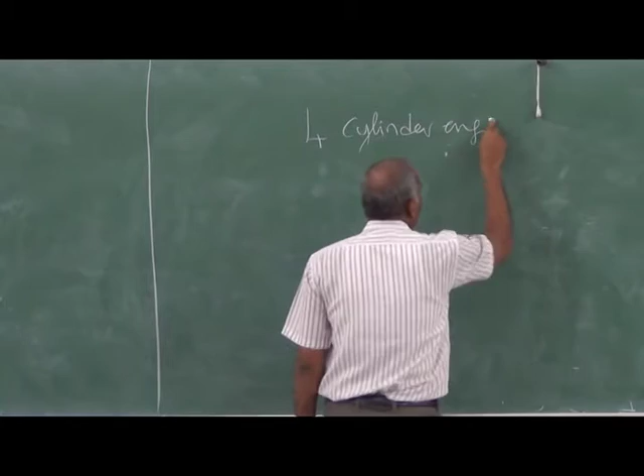We have seen the balancing of a 4-cylinder engine and a 6-cylinder engine. In a 4-cylinder engine, the final outcome of the discussion is that the secondary forces are not balanced.

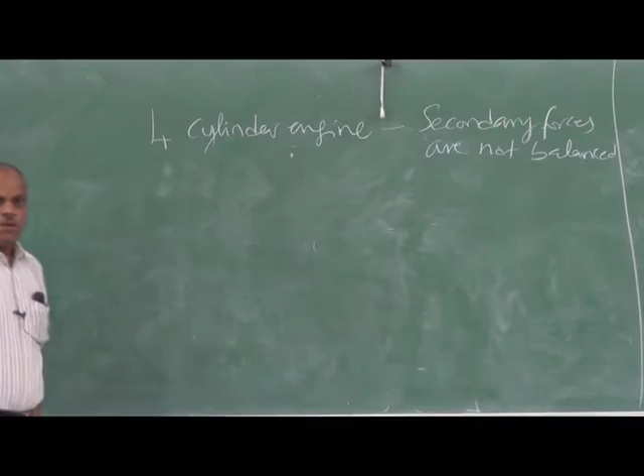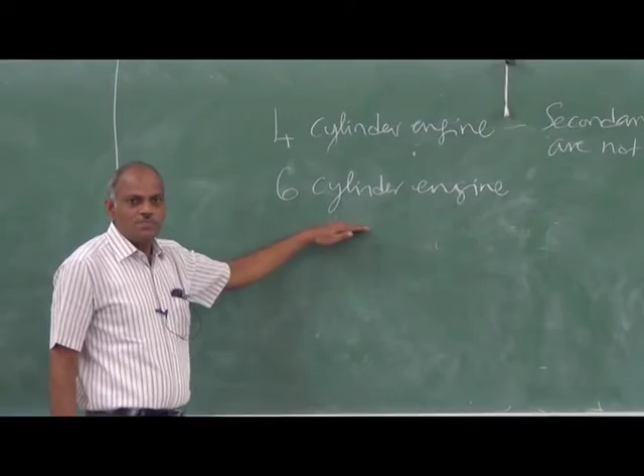Then we discussed the balancing of a 6-cylinder engine. Of course, what I refer as a 4-cylinder engine should have that particular crank configuration. In a 6-cylinder engine with 120-degree crank angle configuration, we found that all the primary forces, secondary forces, primary couple and secondary couple are all balanced.

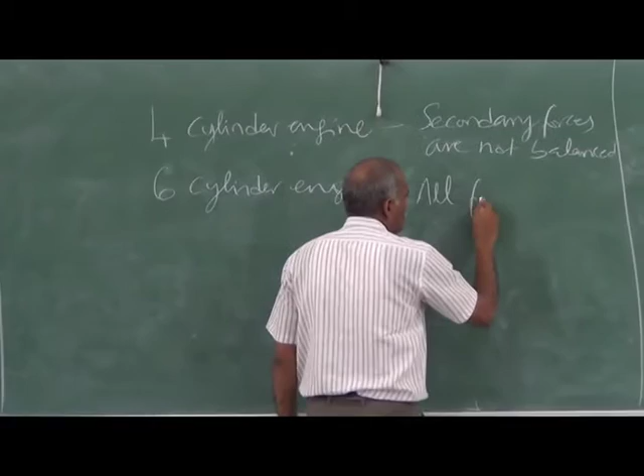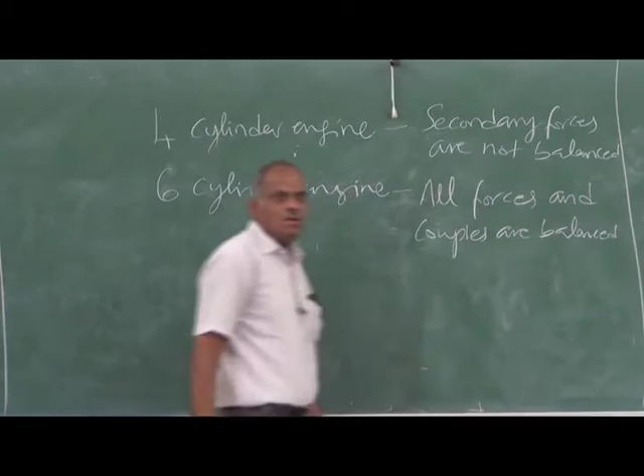So all forces and couples are balanced. That's why the 6-cylinder engine is a popular configuration. Wherever possible, your truck engines, your bus engines, you will find are 6-cylinder engines, because balancing-wise this is a very preferred configuration.

But we should also discuss other configurations before leaving the multi-cylinder engine topic. That is the 3-cylinder engine. Why 3-cylinder? If we ignore 3-cylinder, we are doing injustice.

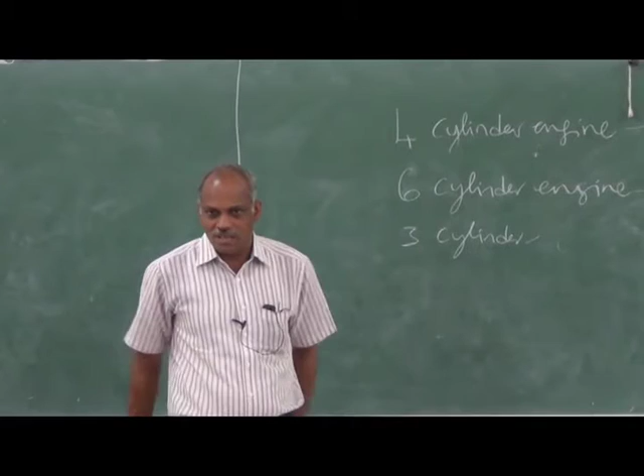So cars used to be expensive. But later, in the 1980s, Maruti introduced a version called Maruti 800. It was a compact car costing about 50,000 rupees. Many people could afford to buy a car. But Maruti 800 had only 3 cylinders. Many cars of today, you find only 3 cylinders, not 6 cylinders.

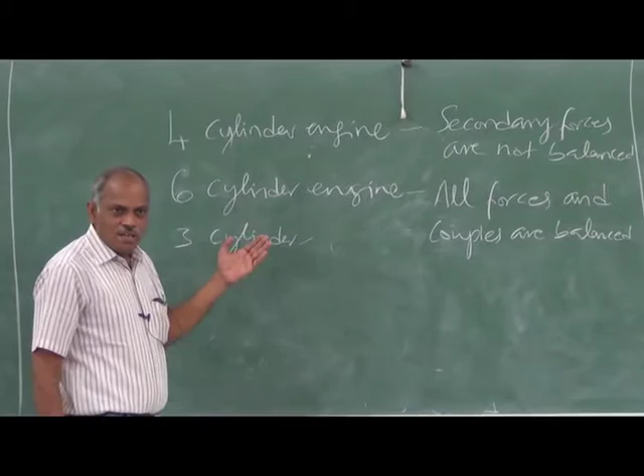So in a 3-cylinder configuration, what are the issues? Whether a 3-cylinder is also balanced in primary and secondary forces and couples - that is what we have to briefly discuss.

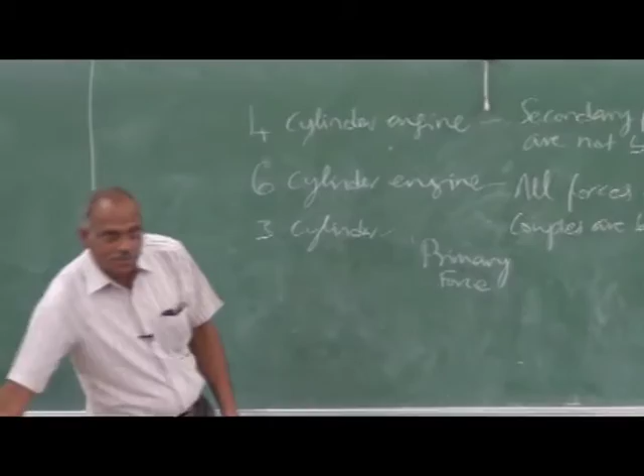So look at the 6-cylinder configuration, the primary force polygon. If you recall, the primary force polygon of a 6-cylinder engine looks like this. This is for the first cylinder, this is for the second cylinder, this is the third cylinder, then the fourth cylinder, then the fifth cylinder and the sixth cylinder. This is the primary force polygon of a 6-cylinder engine, you can recall.

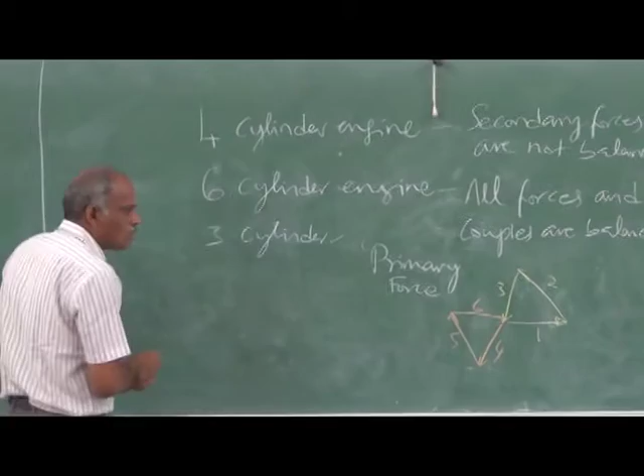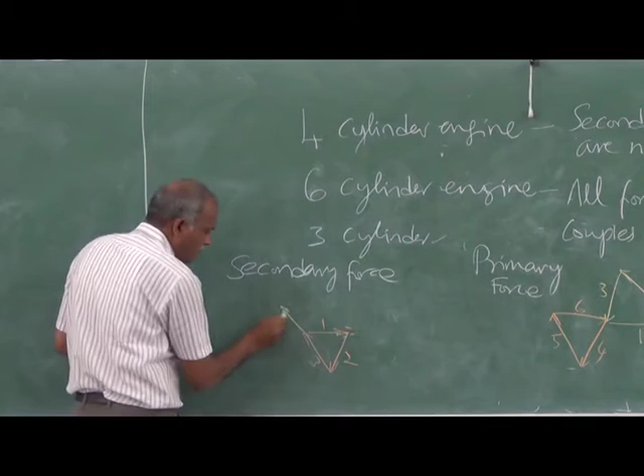The secondary force polygon of the 6-cylinder engine again is, for the first cylinder like this, but this will be approximately 1/4 of the magnitude of that one. This will be the second cylinder, this is the third one, then the fourth, fifth and sixth.

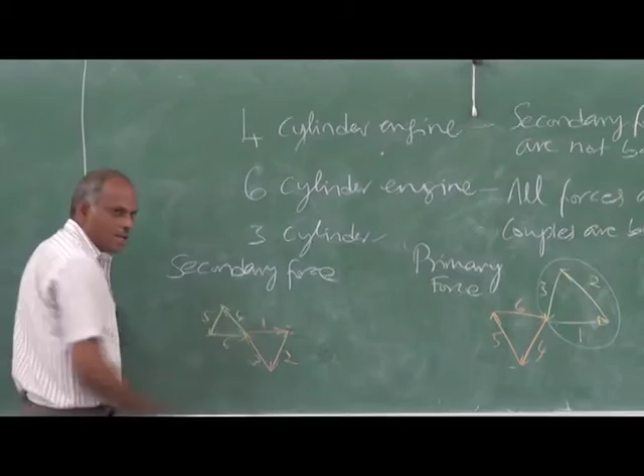So if you look at this, what we can say is, if you take the 3 cylinders alone - the first, second and third cylinders - you will see that particular part of the polygon is closed as far as the primary forces are concerned. Whereas for the secondary forces, you can see the first 3 itself is closed. So without elaborating, if you look at the 6-cylinder engine analysis, the primary forces and secondary forces are balanced separately.

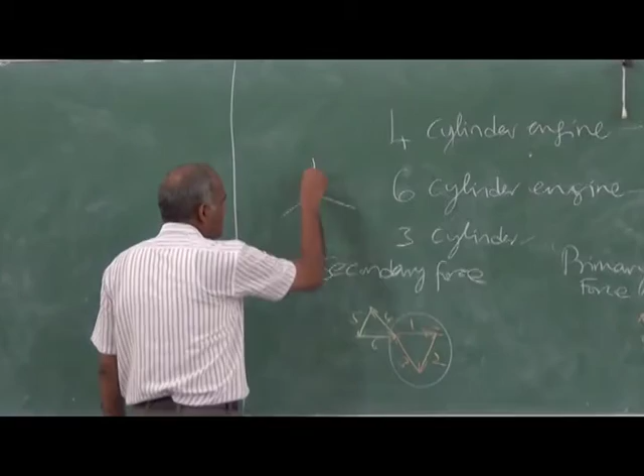So if I have a 3-cylinder engine like this with 1, 2 and 3, the primary force and secondary force will be balanced. But whether the couples will be balanced is the question, because for a multi-cylinder engine, not only the forces but the couple also should be balanced.

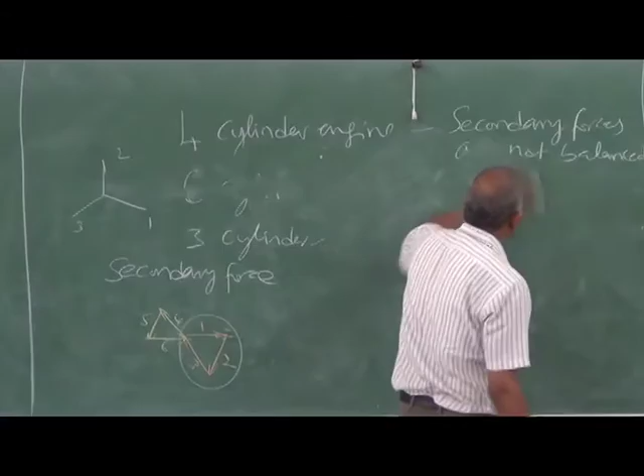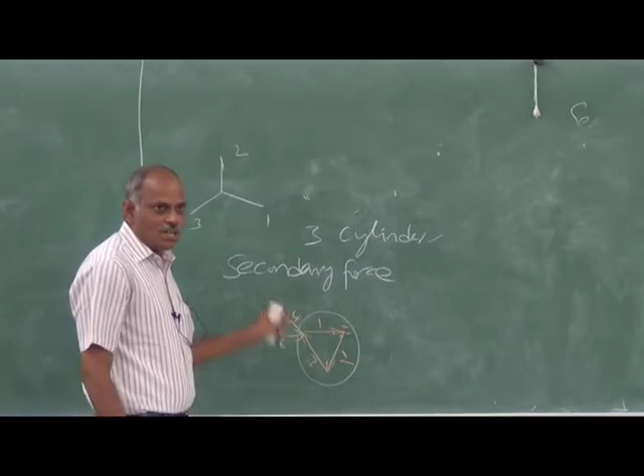So for the 3-cylinder engine, which is the most popular in cars today, the one to start with in India is Maruti 800. Today many cars, if you see, only have a 3-cylinder configuration. In the 3-cylinder configuration, primary forces and secondary forces are balanced, but what about the couple?

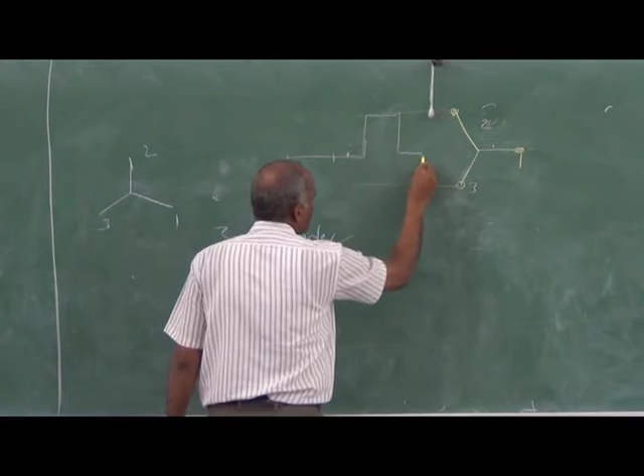So let me draw the configuration. If I take this as the first cylinder, then this is the first one, second, this is third. So if I project this, this will be my second one, this is my third. So this is the first cylinder crank, this is the second cylinder crank, this is the third cylinder crank. This is the side view of this.

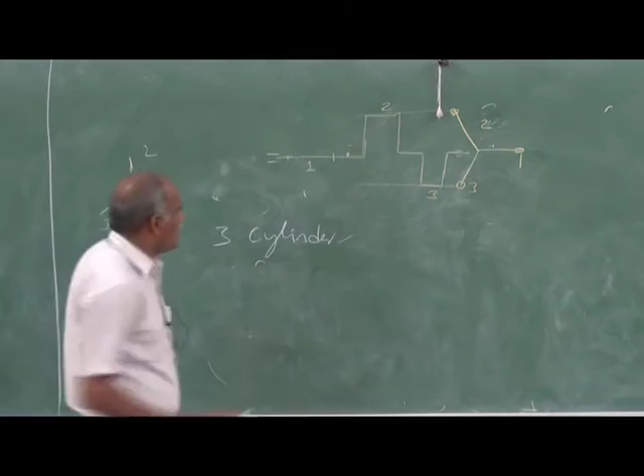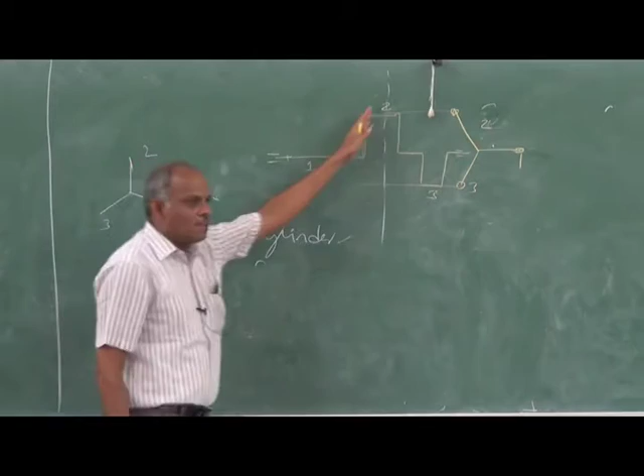So if I take the center of gravity plane of this 3-cylinder block, the center of gravity will approximately pass through the second cylinder, because with 3 cylinders, the middle cylinder will be the center, so the CG plane will be like this. So the moments created by cylinder number 2 will be zero, because it is the plane which contains the CG.

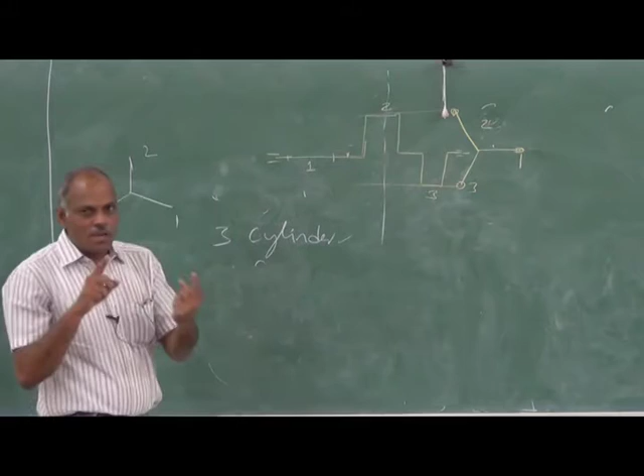But if you take the primary moment created by cylinders 1 and 3, it cannot be balanced because they are not at the same angle. So they will not be producing the same magnitude - they are at the same distance, that doesn't matter, but since the crank angles are different, they may not produce the same force at every instant. So in this particular configuration, the primary couple and the secondary couple will not be balanced.

So in a 3-cylinder engine, you will find that the couples are not balanced. But I don't know that in Maruti I could not find any balancing arrangement. We opened the thing, we could not find it.

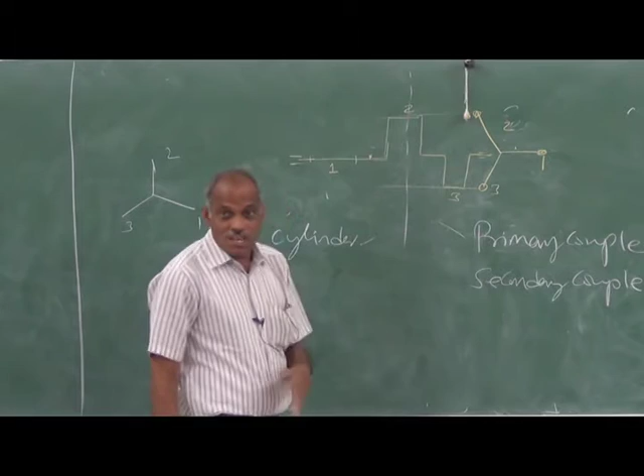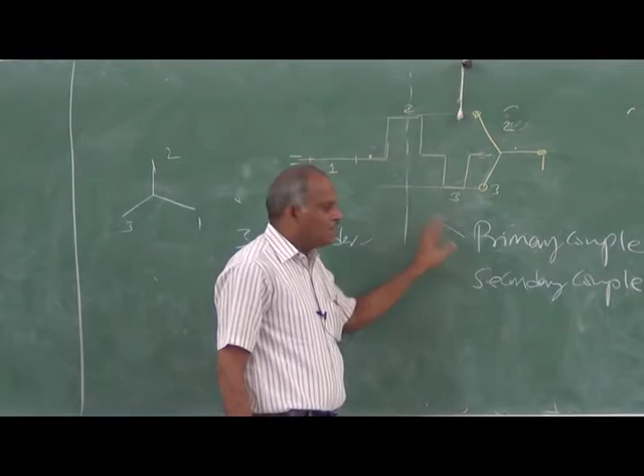But you have to see the new version, new generation of engine. I didn't find any information, but the new generation engine has only 3 cylinders, so whether they have a balancer for a couple, that we have to find out. Then only this will be complete.

So I will discuss now how the 4-cylinder engine secondary forces are balanced and how couples can be balanced. Okay, so that is our discussion. You have any doubts?

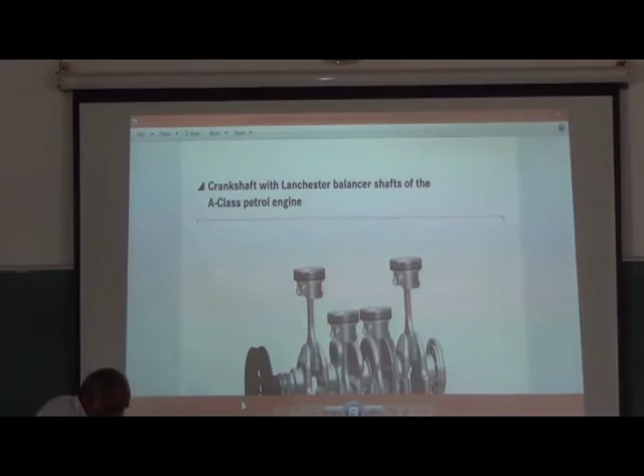Projected is a 4-cylinder engine. It is a crankshaft with a Lanchester balancer shaft for an A-class petrol engine. So it is a 4-cylinder engine. Obviously we have discussed that a 4-cylinder engine doesn't have the automatic balancing of the secondary forces. Therefore, how to tackle the secondary forces? We have to use a Lanchester balancer. So that is what you can see here.

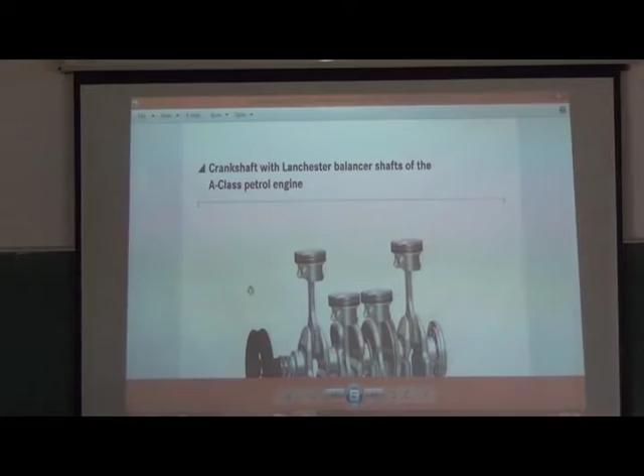So where is the Lanchester balancer? This is the balancer, located exactly at the middle plane, so that you understand all the forces are acting in a plane. As far as reciprocating unbalance is concerned, they act in a plane. So you have to think of always 4 parallel forces. As the parallel forces are concerned, it will act in the middle plane. So the balancing is done in the middle of the plane, and the Lanchester balancer is provided there.

So what is the configuration of it? As we have seen in the Lanchester balancer, there will be 2 rotating wheels. So we will see the basics. This is about used in a Mercedes-Benz engine.

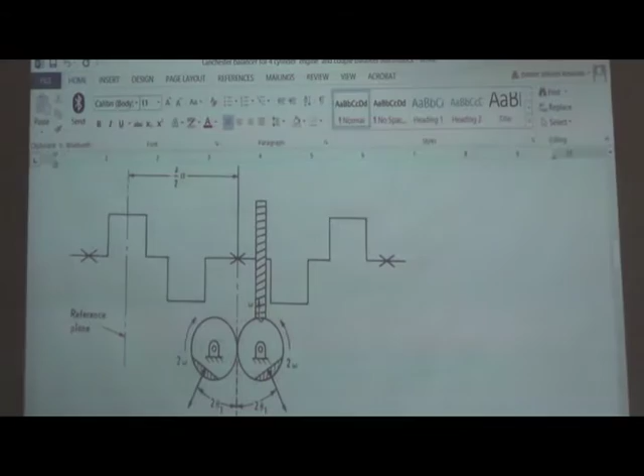This is how the Lanchester balancer is used. We have discussed how the Lanchester balancer produces a force of varying magnitude, sinusoidally varying magnitude. So what we need is 2 rotating unbalances. They have to rotate in the opposite direction. So these unbalances will produce inertial force.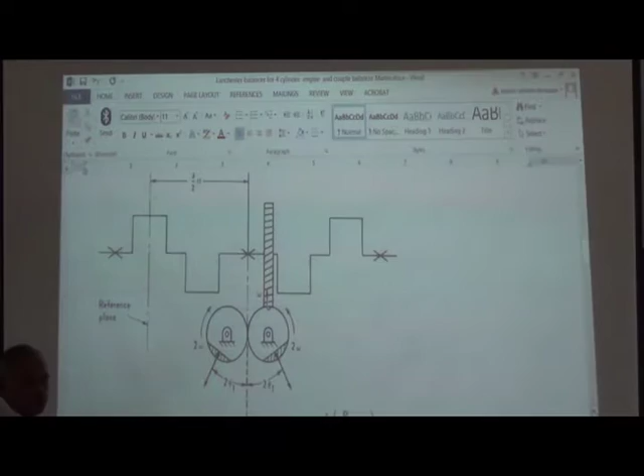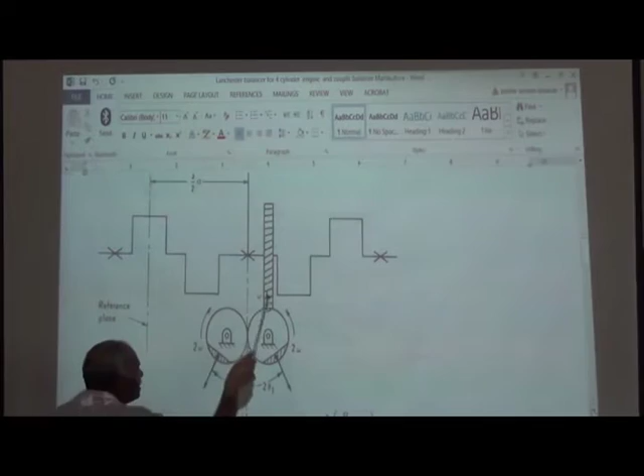It is driven by a gear which is connected to the crankshaft, so that the angle relationships are positively maintained. I cannot use a belt drive, meaning a small angular difference that cannot be accepted. So it has to be a positive drive. The positive drive is taken by gears, so you have a crossed helical gear. You can recall a crossed helical gear, where you can have a shaft at right angles. So crossed helical gears are used here, and these are 2 gears in engagement.

This is exactly placed at the center of the plane. This is the arrangement as far as the Lanchester balancer is concerned, which cancels the secondary forces, because in a 4-cylinder configuration secondary forces are there which could not be cancelled otherwise. So the Lanchester balancer helps you to cancel this. So that is about the 4-cylinder engine — with the help of a Lanchester balancer, I can have a perfectly balanced engine. That's what a refined engine like the Mercedes-Benz engine does.

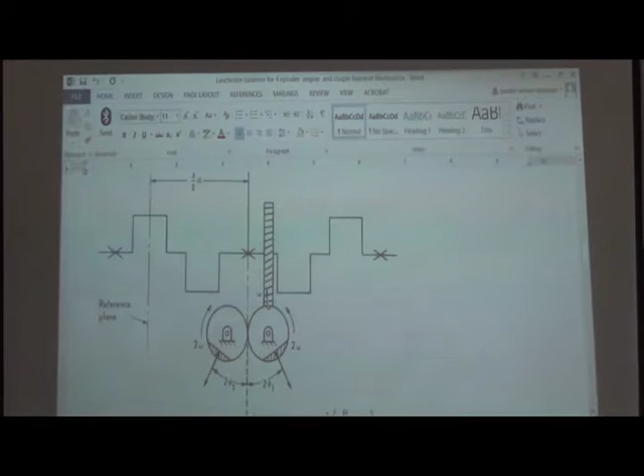Now, when it comes to the three-cylinder engine, you find that the couples are not balanced. But is there any way to balance a couple?

We have said the Lanchester balancer is a device used to create a force of varying magnitude acting in a single line. Whereas, is there any device which can produce a couple of varying magnitude? That can be used for balancing a multi-cylinder engine which produces a couple, and balance it. So here is a device like this.

You can see the device uses, like a Lanchester balancer, an unbalance. So when they rotate, they will produce a force, but it is designed such that these two forces are exactly opposite in direction, parallel in action, therefore it produces a couple. So it looks similar to a Lanchester balancer, but the function is different — this produces a couple.

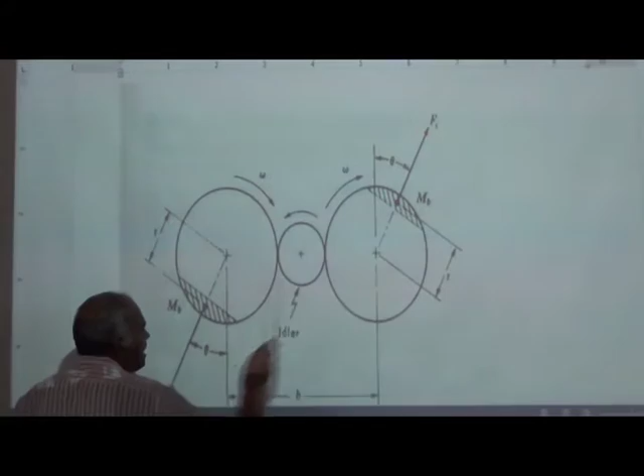In the Lanchester balancer, you can see that these two masses will be at the same angle from the vertical or horizontal, whichever reference, but here the angles are in the opposite direction. They are 180 degrees opposite in angle, so that they produce the forces in the opposite direction.

Another variation you can find with the Lanchester balancer is that in the Lanchester balancer, these two wheels are directly engaged so that they rotate in the opposite direction. But here, these two rotate in the same direction.

If two gears need to rotate in the same direction, you have to use an idler. So here you are using an idler, which produces the force.

Now it produces the couple. So when this is in the vertical orientation, the force from here will be like this, the force from here will be in the opposite direction. What will be the couple magnitude? It will be this force into the distance, that is b here.

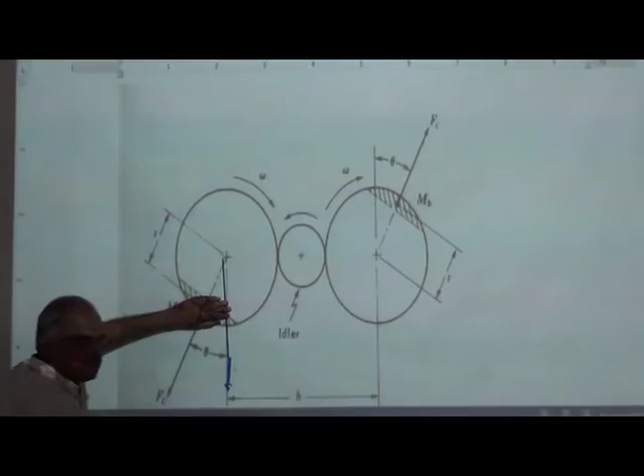That is how it produces a couple. Both of them are going to turn in the same direction. Say this turns clockwise by theta, this also turns by angle theta. So still they are parallel and opposite, and they produce a couple.

But what about their magnitude? You can quickly work out that the distance between the two forces would decrease, and that will become zero. The distance will become zero when these two rotate and come here like this.

When they occupy this orientation, this is in this direction, this is opposite, but the distance is zero. So this produces a kind of sinusoidally varying magnitude couple.

That particular sinusoidally varying magnitude couple can be placed anywhere on the engine to balance the couples produced. If this rotates at the same speed as the crankshaft, this will cancel out the primary moment. If it rotates twice, and you select the magnitude such that it balances the secondary, it can balance the secondary.

So this is a device that is used intelligently to cancel out the couples. It produces a couple.

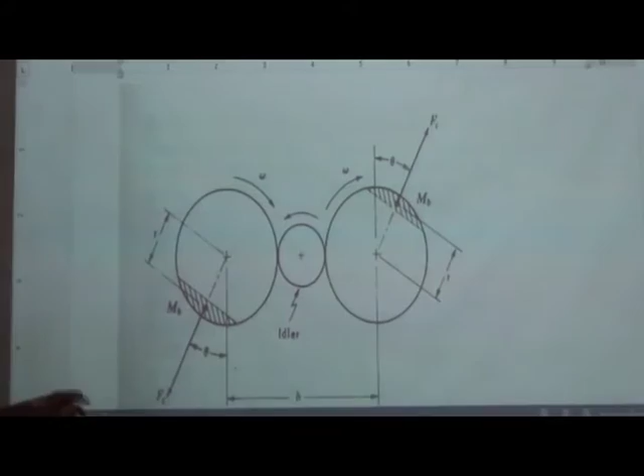I will quickly work out how it works, how the angle is a component of this, how the couple magnitude is a component of cos theta. Let me quickly draw a diagram and show you. Do you have any doubts?

Okay, we'll pause and then go back to the board.

This is the configuration of a couple balancer. Of course, there is an idler wheel here, so both of them will rotate in the same direction. Let us take that it rotates in the clockwise direction.

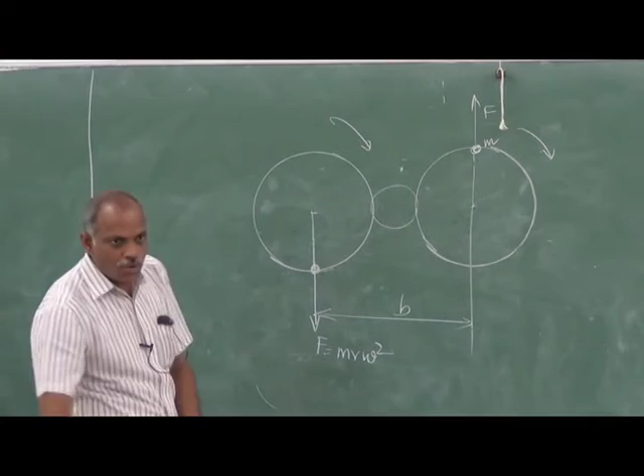Now when the masses are in the vertical direction, the forces produced by them will be equal, that is mr omega square. One will be in the downward direction, the other in the upward direction. These are two parallel forces with an offset distance b. The couple produced in this configuration at this moment is F, so the couple M is equal to mr omega square times b. There is no issue.

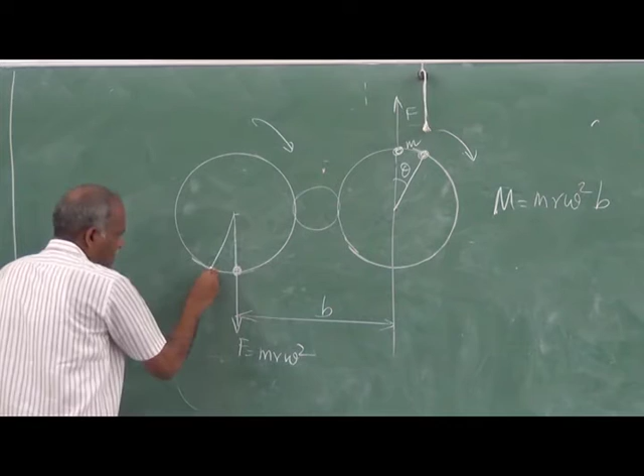Now when this turns and occupies this position later, that angle, if you take, is theta; this also will turn by the same angle, because they are rotating at the same velocities. So if I draw this line...

That is the direction in which my force will act now. This is the direction at which the force will act. This is the direction at which the force will act now.

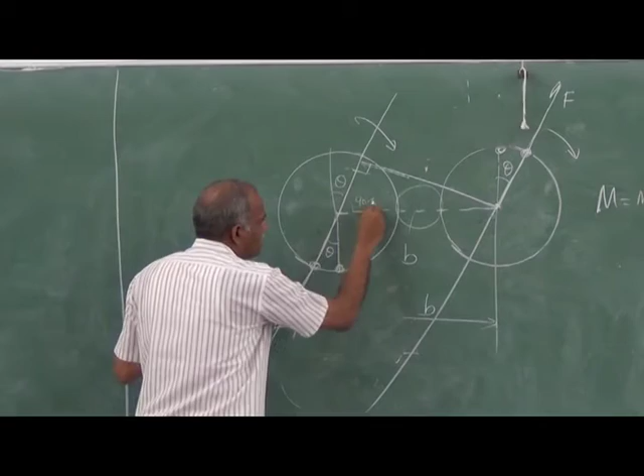So the distance between the two is decided by the shortest distance, so I draw a perpendicular to this. If you take this distance, that is your center distance between the two wheels, that is B. And of course this is theta, and if you take this angle also it will be theta. This will be 90 minus theta. So this angle should be theta.

So what will be this value? Suppose I take this distance as x right now, so I have to replace this b with x. That is equal to mr omega square times b cos theta. So you have b cos theta.

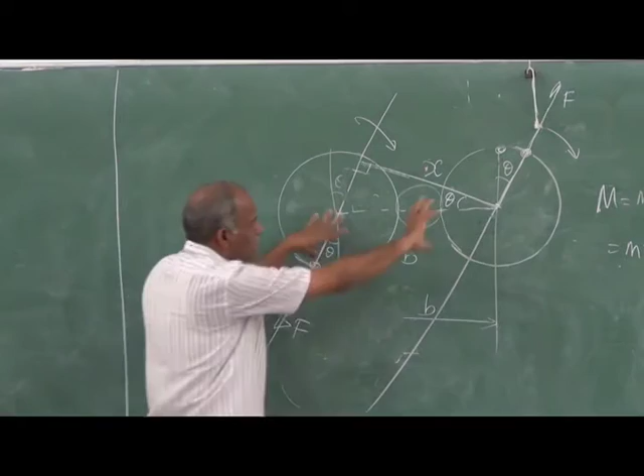So when these two wheels rotate in the same direction, the masses occupy this position, and the magnitude of the moment changes as a cosine function. That is what we are looking at, as far as reciprocating masses are concerned, because mr omega square cos theta will be the force produced, and the distance of the particular cylinder from the reference plane, the center plane, will be b, so it will be cancelling out. This is how this particular thing works.

Do you have any doubt?

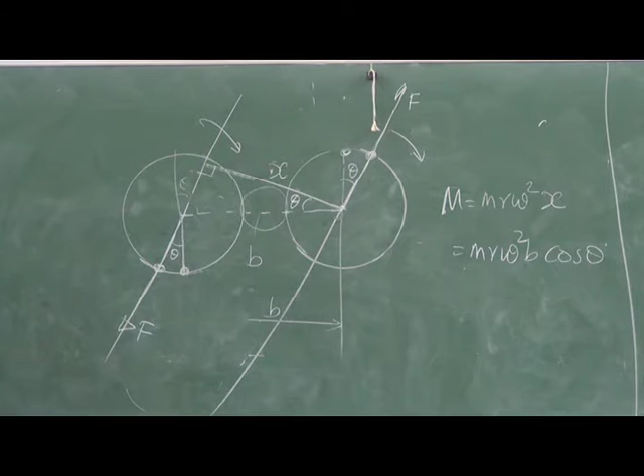A 3-cylinder engine without this kind of balancer will be producing a couple unbalance. If it is negligible, you can live with it from a cost-benefit point of view. Otherwise, if you want a refined one, you must use such balancing devices to balance it.

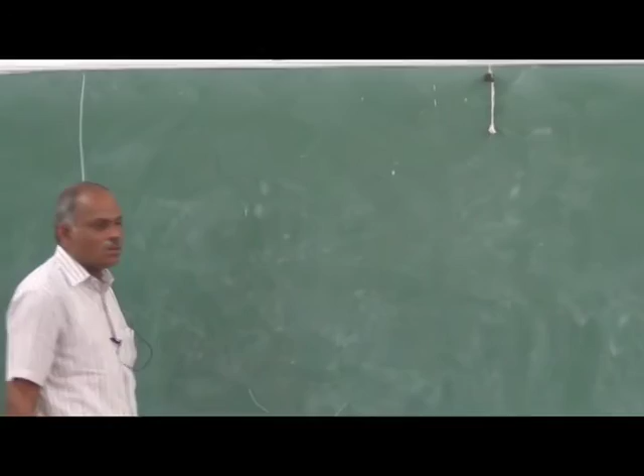Now coming back, with this I think I have finished balancing of reciprocating masses as well. The next topic, as I told you, is balancing of complex motion devices, the devices which are moving in a complex way.

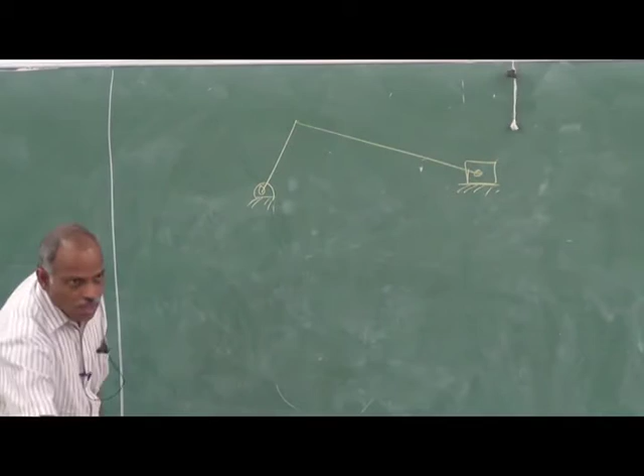So you see that when you think of a crank, this is rotating, the piston is reciprocating. Of course, a crank will have an unbalance. Obviously this will be having a configuration, this will be unbalanced here, so this needs to be balanced.

So the principles that are used for balancing a rotating thing can be applied here. So I can provide something in the opposite direction, because the balancing mass can offset the unbalance of this, our rotating mass is like this.

So this is the mass I have added to overcome the rotating mass unbalance. Then, as far as the reciprocating masses are concerned, I can balance it at least partially. I add a little more additional mass required to balance the reciprocating part. So I can say this is rotating, this is reciprocating. This is how I partially balance it.

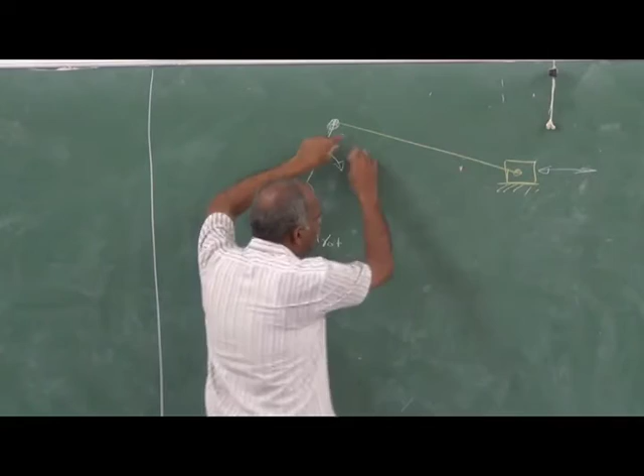But what about the connecting rod? The connecting rod will also be having a mass, will also be having a moment of inertia. So how to balance the forces acting on it, because it is going to produce some inertial force. We have seen in the inertial force analysis that this is to be balanced. So how to balance it?

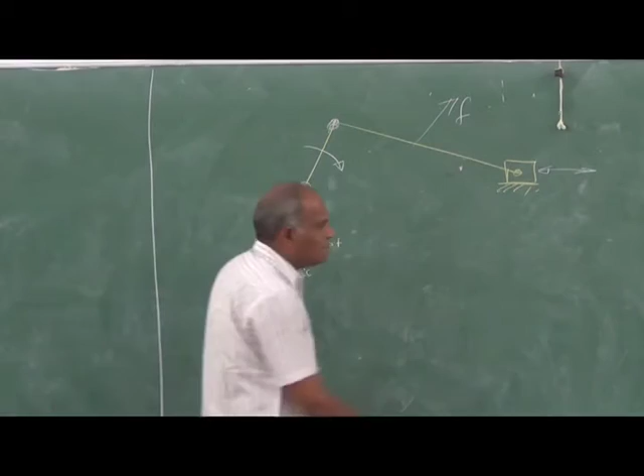We know how to balance the rotating unbalance and the masses, we know how to balance the reciprocating masses, but we do not know how to balance the complexly moving masses. So how to do that is to go back to the idea of the dynamically equivalent system.

You know the dynamically equivalent system, we can model any mass like this with two concentrated masses. The condition we know is that the Cg of this should be same. So you can recall that idea and bring it here for finding out the dynamically equivalent of your connecting rod.

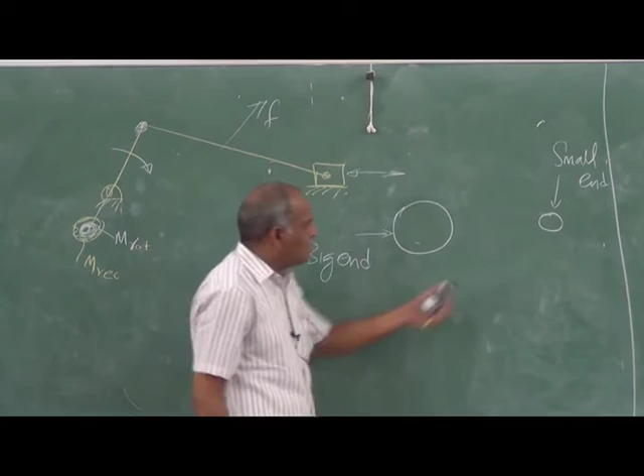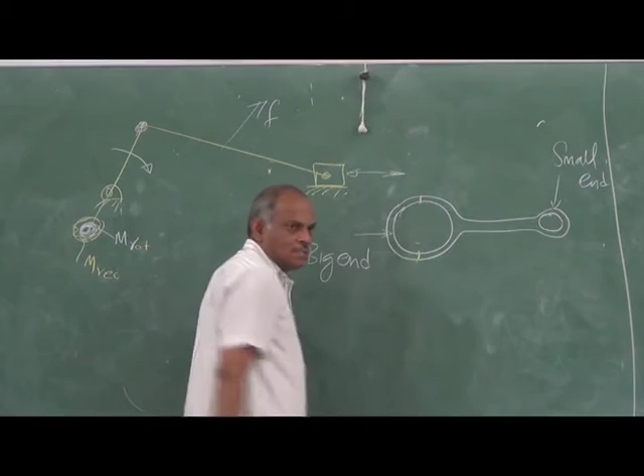The connecting rod will have some configuration like this. This end is called the big end, this end is called the small end. So this is connected to the crank and this is connected to your piston, that is the gudgeon pin. So this will have some configuration like this. And of course, for assembling the connecting rod of a multi-cylinder engine, this will be split here because you put it and then attach. So those details you can see.

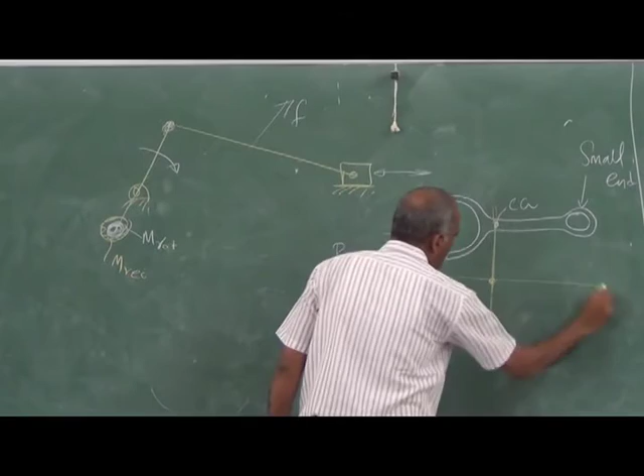Now this center of gravity will be approximately here, that you can find. This will be your Cg. So you try to model this as a two mass system so that the Cg is still the same. So you can find out the two mass system. I can have one mass here at a distance, say L1. I can find out what is L2 here. So this is my mass M1, this is mass M2. This will be my so-called dynamically equivalent system of a connecting rod.

So you remember there are three conditions for a dynamically equivalent system: the mass should be same, then their center of gravity should be same, and their radius of gyration about Cg should be same. So three equations, but four unknowns are there. So you have to start by assuming something.

Let me assume that it has to be placed at the center of this big end. So that location I am fixing. With the three equations I can find out what is M1, L2 and M2. But you will find that this mass is not located at the other end, that is the small end bearing, at the center of the small end bearing.

When you calculate the dynamically equivalent system of a connecting rod, you choose to place one of the masses here at the center, then you will find that L2 is such that... how do you find out? L1 is fixed, K square is equal to L1 into L2. So L2 is automatically fixed. So that will be here somewhere, which is invariably short of this, the small end of the connecting rod.

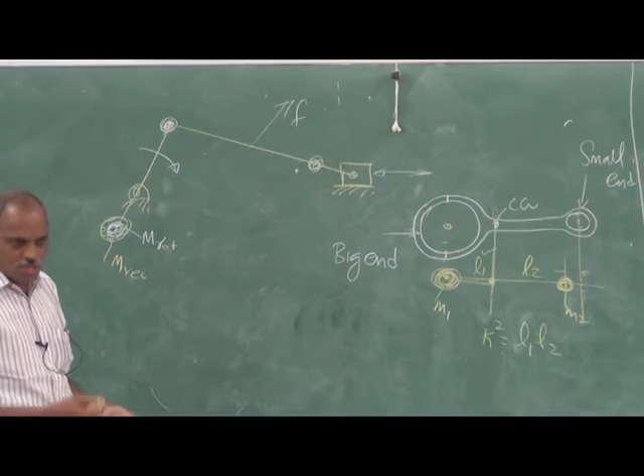I said that if you find a dynamically equivalent system with two masses, I can place one mass on a rotating crank, the other mass at the reciprocating thing. But when I work it out, I find that if I choose one of the masses to be at the center of the big end, the other mass location is not fixed there—it will be somewhere short of it. So what we do is we forcibly shift this mass here.

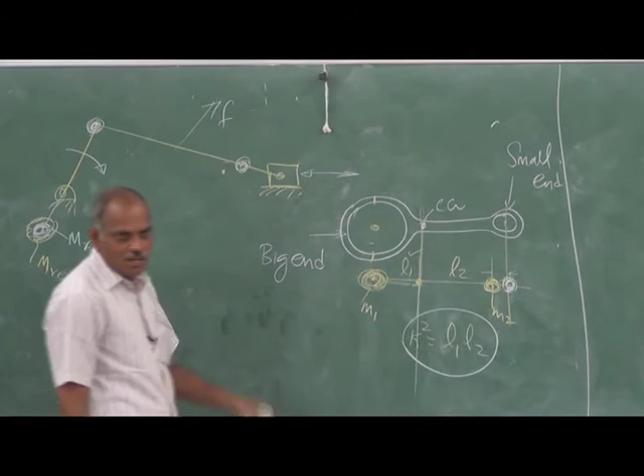We shift the mass here. So when we shift the mass, we are violating this. That is the first two equations - that is, center of gravity is preserved, and M1 plus M2 is equal to mass of the connecting rod. First two equations I can comply with, but the third equation, the radius of gyration, this I cannot comply with if I forcibly shift this to here.

What will happen is, I am making not a perfect dynamic model, but an imperfect model. Imperfect model means it will not be exactly equal to the dynamic characteristics of it, that will be with an error. But what to do is, you have to live with that error. You put this here so that this can be shifted and added to this reciprocating mass.

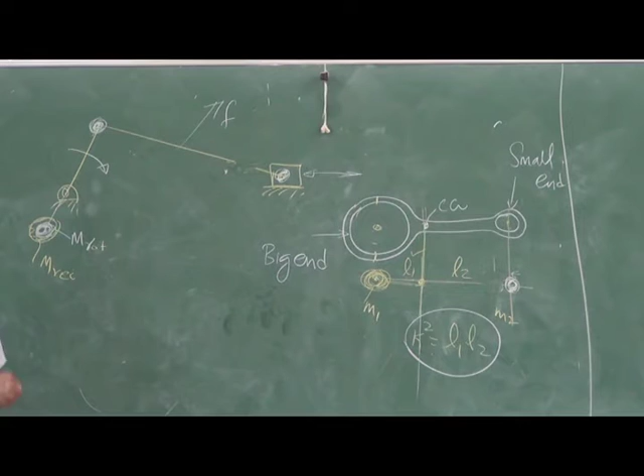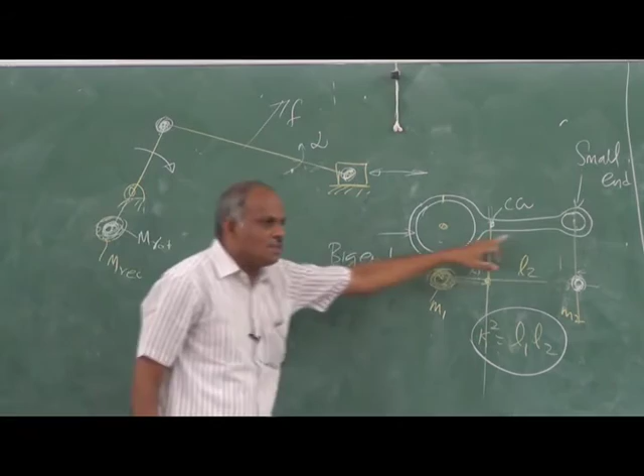Consciously, with the compromise, knowing that it is not going to be a perfect model - what will happen is the inertial torque will not be the same. Suppose this is having an angular acceleration alpha, the original dynamic model will be producing an inertial torque which the crankshaft will produce. But since this is an imperfect model now, it will produce a torque which is different from that one. So that torque compensation, that difference, should be introduced. If you do this, there will be a small correction torque to be introduced, but this is the only way.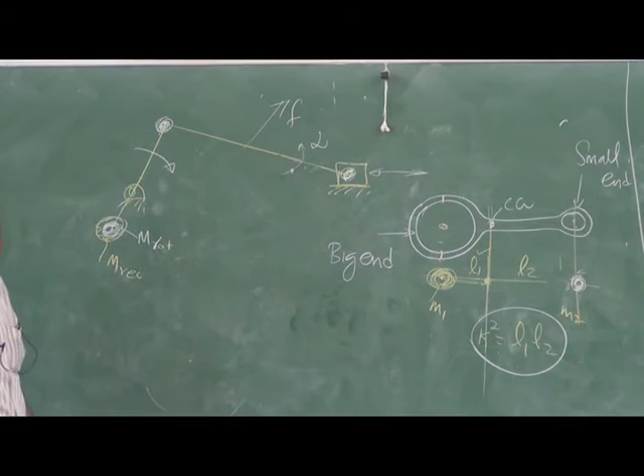So what people have done is, they have taken this imperfect model of the connecting rod, split it - one part is here and another one is here. We knowingly accept there will be an error. Then what is required is, suppose this part is M1 and this part is M2 - rotating masses should include M1, and reciprocating mass should include plus that M2. Of course, you know that for a single cylinder engine, for a theoretically perfect one, this is half of it.

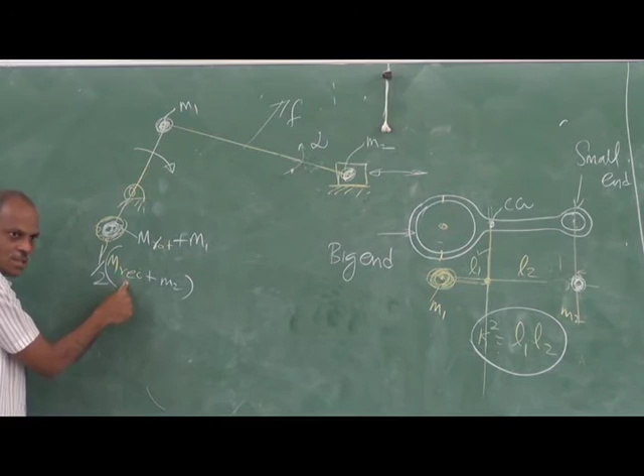So your unbalance calculation has to be done in such a way that it includes the reciprocating mass of the piston plus the part of the mass taken from the connecting rod model. Here the rotating mass will have not only the rotating unbalanced mass but also the mass coming from the connecting rod. So you have to take all these things into account, so that a single cylinder engine, which is not perfectly balanced, becomes much better than before attempting to balance.

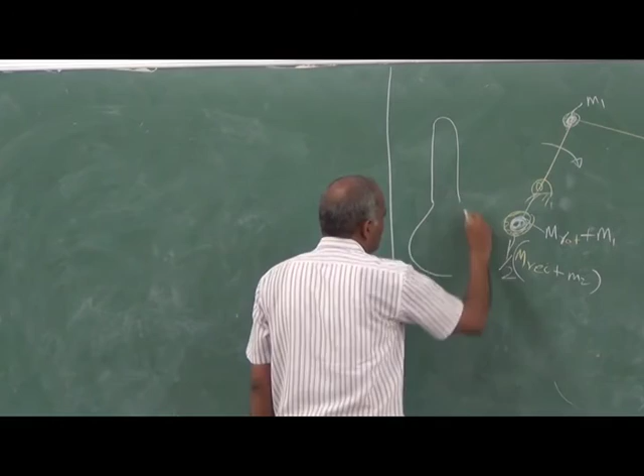But in case of a multi-cylinder engine, you have the comfort that many of the things are balanced. So that is the idea of this thing. If you look at your crank, the shape of the crank will be like this - this will be your center of rotation. This particular thing, the crank web, is accounting for this unbalance. It is not done just for the shape or elegance, it is calculated and the particular shape is taken.

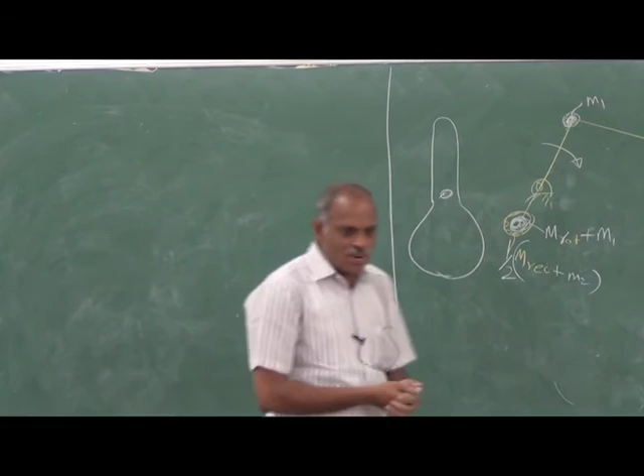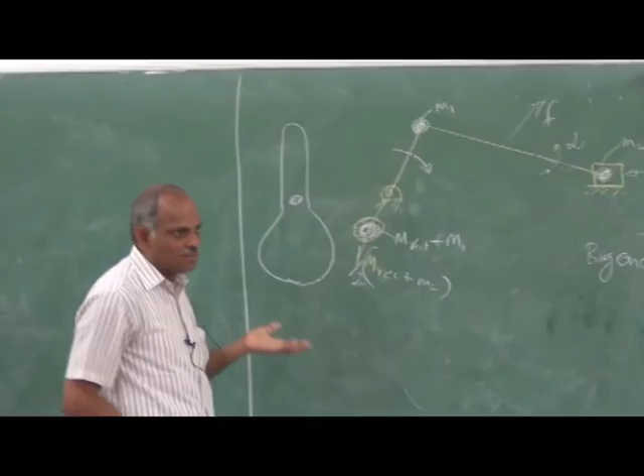Okay, before completing, if you take all these things into account, what will be the shape of the unbalance - how the unbalance will vary with the crank angle? We will have a small look at it and then conclude. Okay, we will just go for a projection now.

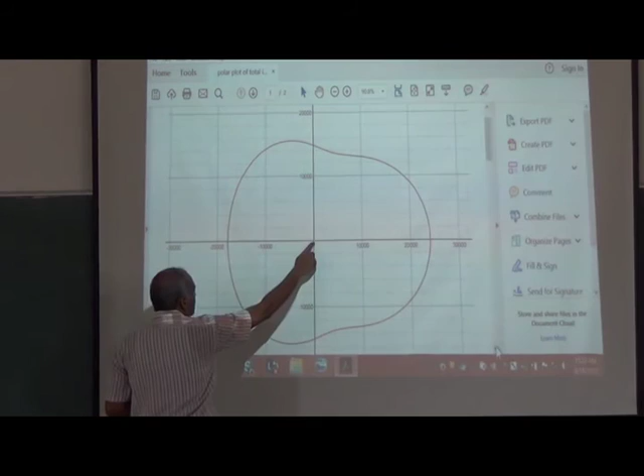Cylinder engine where the connecting rod unbalances are taken into account. This is the 0th degree crank angle, this is 90 degree, this is 180, this is 270 - so the crank angle keeps on changing. Then what is the total unbalanced force? That means unbalanced force due to the rotating masses, unbalanced force due to the reciprocating mass, unbalanced force due to the connecting rod - all these things are counted. Then it will see that it is 0 and then slowly it keeps changing.

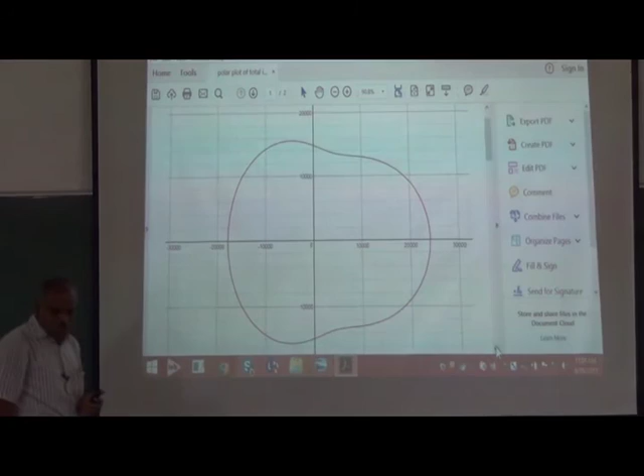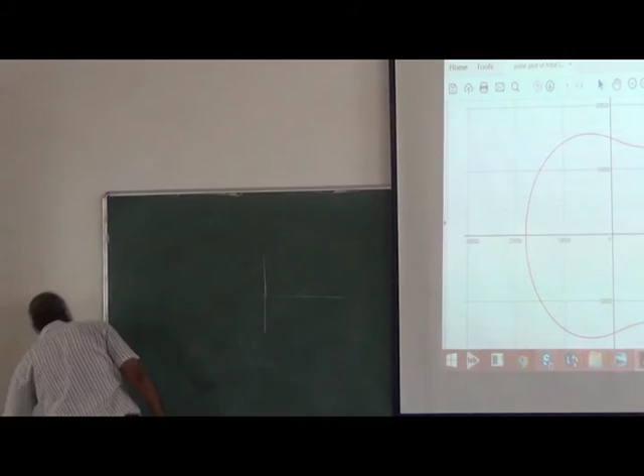How this diagram is drawn - if you look at it, first the inertial force at a particular crank angle theta, the inertial force due to the rotating thing is taken, so that will be occupying the radial direction. Then the reciprocating unbalance will always act along this line, the horizontal direction, because that is your reciprocation direction - this will be the component of primary and secondary. So the net is what you see. This is one point, and this is continuously done for every angle.

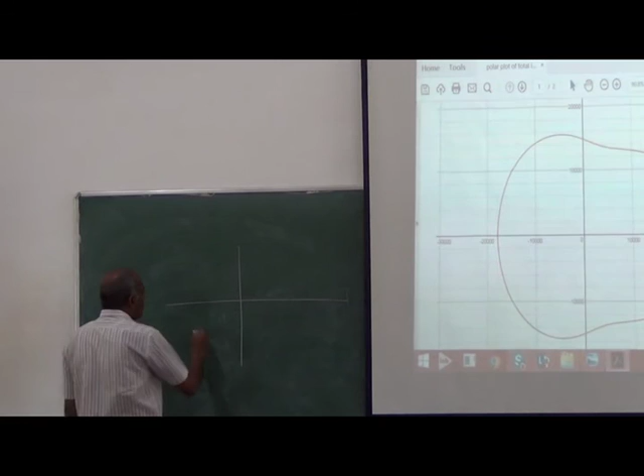You see that it is not a constant. What is this thing? It is not constant. Okay, then after - this is the total unbalance. So if you try to reproduce this here, the total inertial force is something like this, at least approximately. After adding the counterbalance to balance it, you will see that this comes a little bit like this. This is the total unbalance, and this is after balancing.

So if the maximum values are minimum, you can find out the maximum values somewhere. If that is minimum, you can adjust this counterbalance. When it is minimum, then you can say you have achieved the best possible balance. Okay, so we can close.